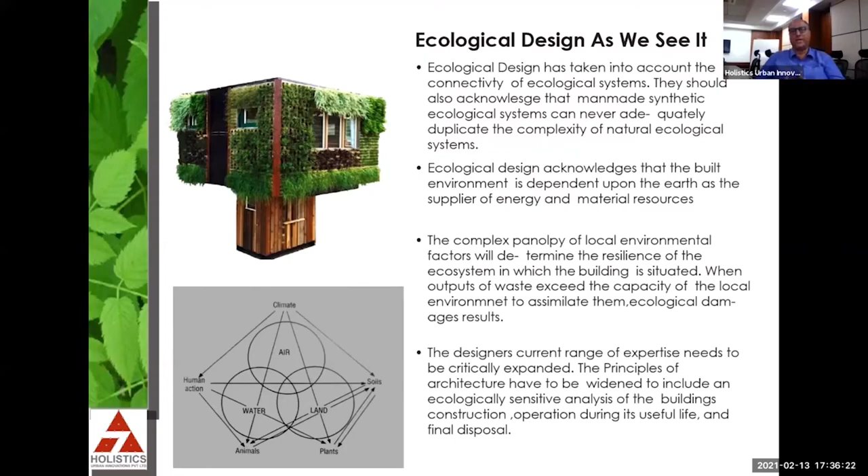The ecology design should take into account all these systems and adequately duplicate the complexity of natural ecological systems. It should know Mother Earth as the supplier of energy and material resources. The whole system should know how to recycle, reuse, and revisit all the wastes that exceed the capacity of the environment in these days, especially plastic and electronic waste. The designers should have expertise to be critically expanded in terms of wisdom, to include sensitivity, economic analysis, operations during useful life, and life cycle costs.

The theoretical framework for ecology design is very simple. Every system - when you come to the presentation, you'll find out how HUIPL has designed building systems. Generally a system has output and input. There's a process in which there's a benefactor, a beneficiary, an obtruder, and an objective in the process.

With all these things, the econometrics of ecology, sustainability and design should give ecologically sustainable design, which is itself a sustainable concept. So you come from part to whole, or whole to part. It's better to come from whole to part in this case.

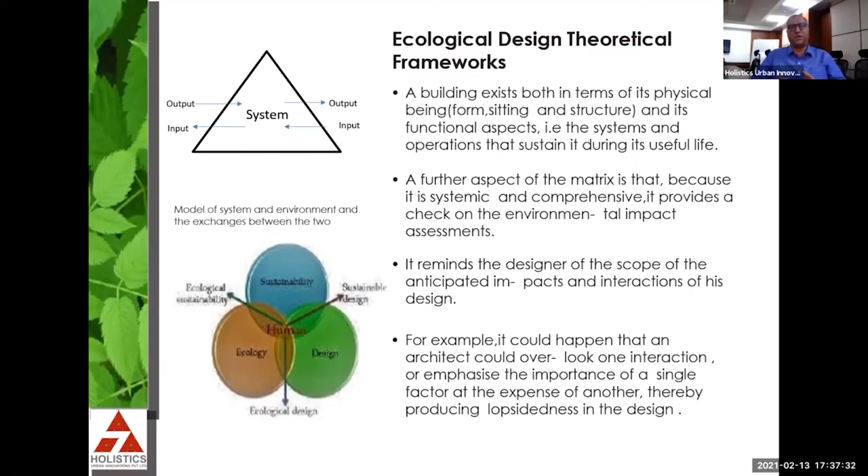I personally believe, with my 25, 30 years of experience in design, it's very simple - the design emanates from 5 elements of life only: earth, fluid, spirit, air, and fire. All architects know that whether it's biomass, built form, or ecology, these are somehow related in some alpha, beta, or gamma way with the whole process.

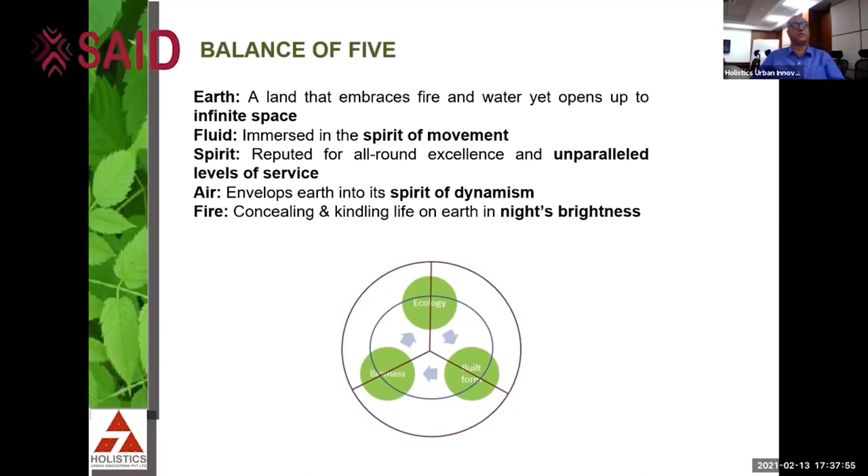Whenever we design buildings at HUI, we have these objectives - generally all architects have this - they want to create a state of art, futuristic buildings. They want to benchmark it with the best in India. They want to aim for LEED Platinum, passive solar techniques, rotation, green vertical walls.

This is where it starts - the green thinking starts. But this is where our design ends. How we have gone - basically every design process has an activity pattern and a circulation pattern. It has an activity concentration and a circulation concentration. How to delineate it properly is where the designer comes in, and how to make it interact with the environment.

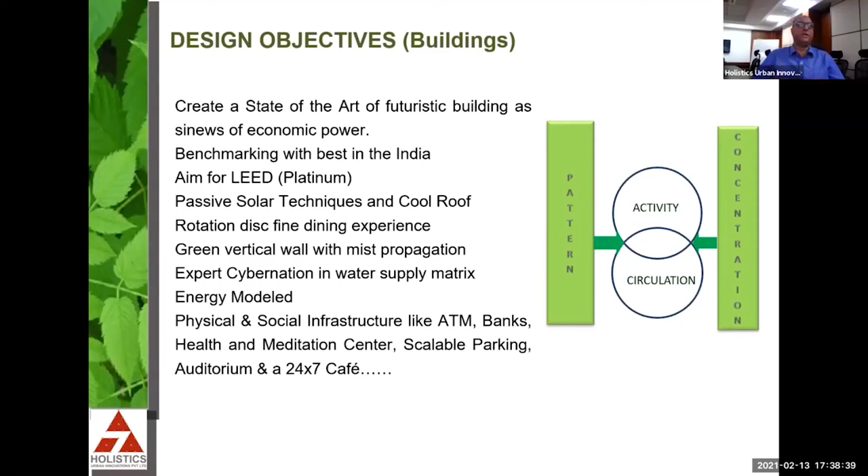This is what's most important for any eco-design building. See, the general building goals in India right now, everybody wants to have office complexes with USGBC, TERI GRIHA, and B. This is all component level, the building level.

But what impact it has on the biomass, the grey water system, the blue water systems, what is the effect on the total environment, and then as a component of the whole world, it needs to be seen by all architects before they design. I had been emphasizing in all the seminars that whenever we epitomize something as best modern architecture, it is not modern architecture.

We have modular grids, 8.5 for offices, 4.5 for residences. These all things are okay when it comes to the box thinking of form and function. If you actually want to see from biomimicry to bioclimatic architecture, you should see the building as part of a larger process of biomass, a larger process of blue systems, a larger process component of air, water, and even the temperatures regarding what we call mitigation of the heat island effect.

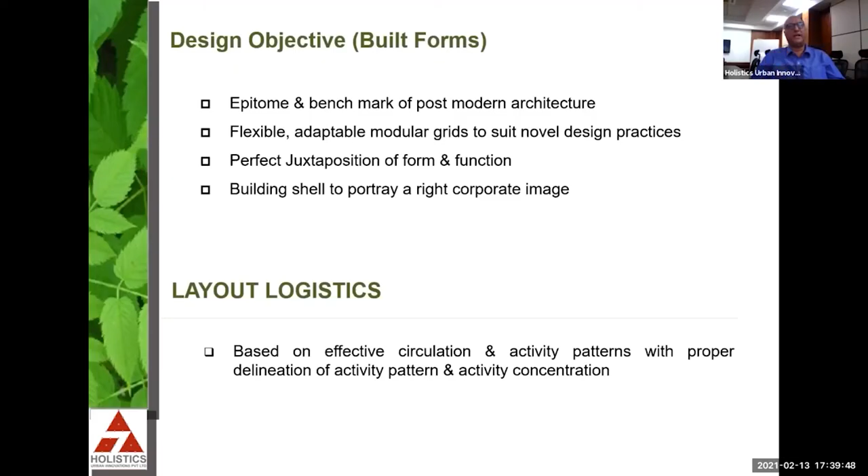There are two phases, the building design and the master planning part of it. So if you see the eco master planning process, it has simply 4 systems. The blue infrastructure, which contains water supply, water bodies, water life, aquatic life.

Then you have grey infrastructure, which is water, roads, sewer lines, water circulation, grey water, and this is how to do watershed management. Then you have red infrastructure, which is human body, human life, human population inside a building, their interaction with the environment.

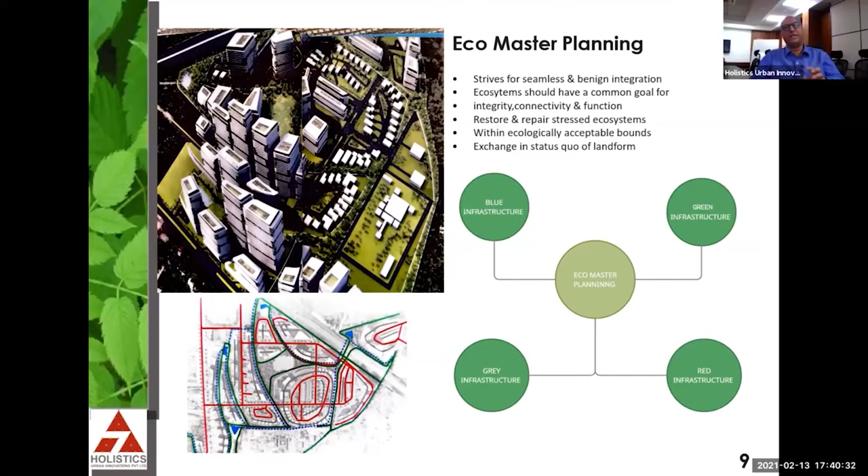How you have to make the walkways, their relation with built forms and the perception of the built forms. Then you have green infrastructure, which is generally landscape, green linkages, linky greens, and a lot of ecospace. In the eco infrastructure, we have listed certain factors which are the objectives of a design.

Whenever we do a green infrastructure planning, we should classically see and conserve natural features. Ecological connections to the whole process should be in terms of air, water, land. It should not be physical, it has to be conceptual also.

Then retention of biosphere - whatever component of biosphere is there with us in that small area we design, we contribute to that. Then prevention of air and water pollution at that component level only. And then microclimate control, which is very important in terms of mitigating the heat island effect.

Most of the projects we do are based on authority where water is to be carried from Ganges to Noida. So we should try to see how the whole process can be taken with less water usage, innovative water technologies, how we can put less stress on water, especially at the city level and at the national level.

Then grey infrastructure, large engineering systems such as roads, sewers, drains, eco-engineering, efficient transportation systems, battery-based, then energy utilization for this transport, how to reach the site. Most people generally say we can use bicycles, but that's not possible. So you have to have eco-gadgetry hardware and efficient transport systems.

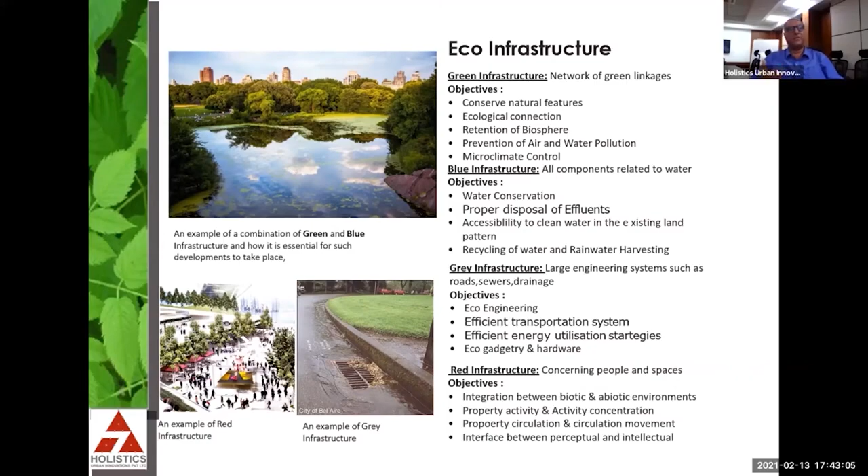See, the design objectives of planning - what we basically need is, from the economics, you have a social grid, you have to have an energy efficient grid, a waste recycle grid, and this should give rise to one synergistic whole.

See, generally people say ecology is a part of environment. We say it is not. Environment is based on other factors, it's based on land, water. Ecology is larger - it's on biomass, aquatic life, the natural runoffs. So we have to integrate both of them.

Then you should have landscape which can include major theme parks and sport complexes together. Then it should be equipped with state of the art physical, socio-economic infrastructure, like net infrastructure, net connectivity, charging points, battery charging points. This is a part of the planning process now.

Like 10 to 15 years back or two decades back, we used to see glass as a medium of showing sinews of economic power. Now these things are sinews of economic power. And people started talking about watt per square feet in office spaces, generic power, and wastage of power, light watts. This was not initially there.

People started coming to talk about fossil fuel level power also, cost per square feet of fossil fuels to run a complex. And then fifth generation intelligent regions we should have with full use of information communication technology.

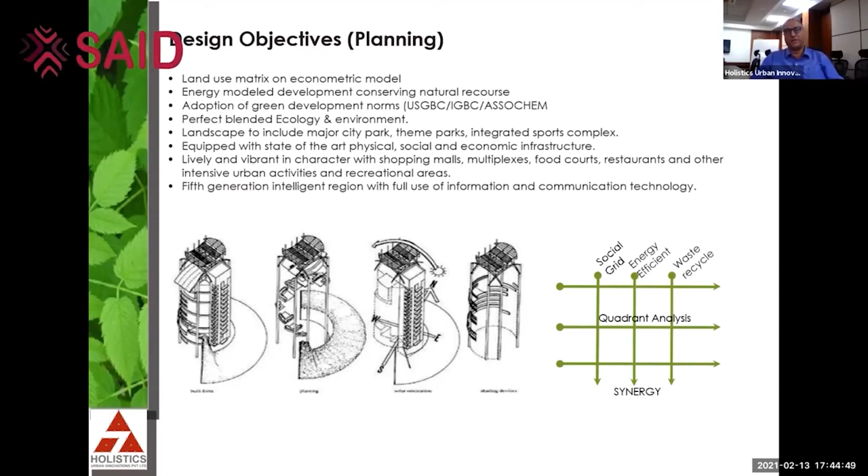We should use technology to enhance the green mass, enhance the ecological parameters, and enhance the green parameters of development. This is the methodology we use generally in planning at our office at HUIPL, which we have designed over time because of our experiences.

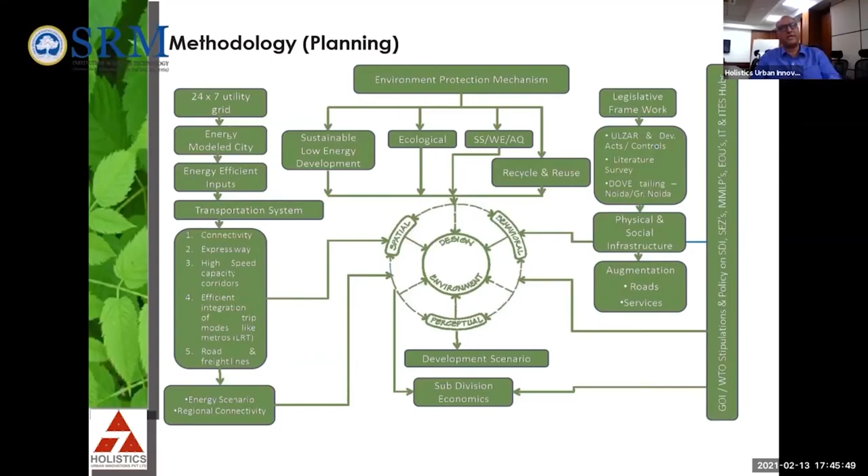And then we come to sub-division economics. What was the plot size? We did a township in Dehradun 10 years back, which was zero discharge at that time. Though it was on the bank of a river, we didn't draw water from the river. We had municipal supply and our own augmentation systems. We were first to use watershed management, rainwater harvesting tanks there, which was distributed again by gravity to the people.

Now, what in India we miss mostly in our country is that we don't have an evaluation or review of our built-up programs - that whenever we make something, we never have a survey of whether a city had biomass of more than 20 acres, or what other requirements of greenery are already present, and how to save the ecological footprint. So that is where the whole thing comes.

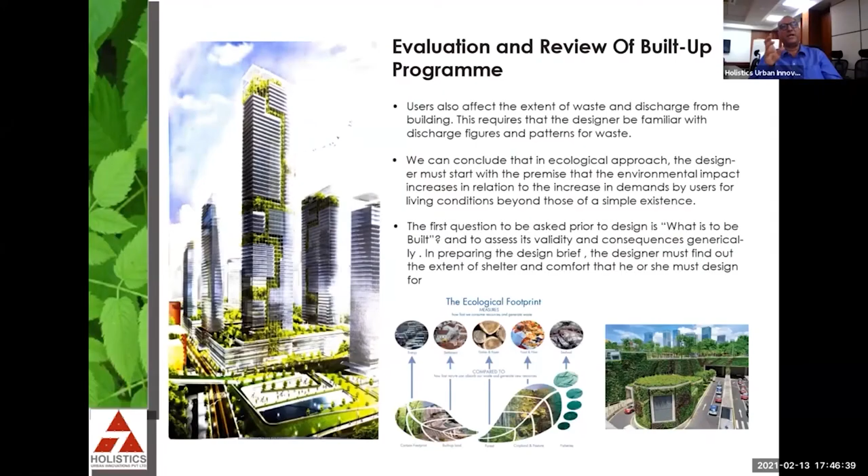What we try, our modest effort is to save this ecological footprint and have least environmental impact on living conditions. Then in preparing the design brief, the designer has to find out basically shelter and comfort at what energy cost it is there. Now, coming to the component level building design.

If you see contemporary architecture, after we do the planning part of it, we have green architecture also in place. We have high-tech architecture also in place. We have creative architecture. We have parts of Bionic architecture in place.

Now, Bionic is one thing we are now going into, because all these natural shapes which are coming all over the world are based on the thought that some of our biology and plant structure is structurally safe. It is environmentally friendly. It has all the process of carbon cycles, carbon rating points, and oxygen production systems. So that forms the basis of fractal geometry.

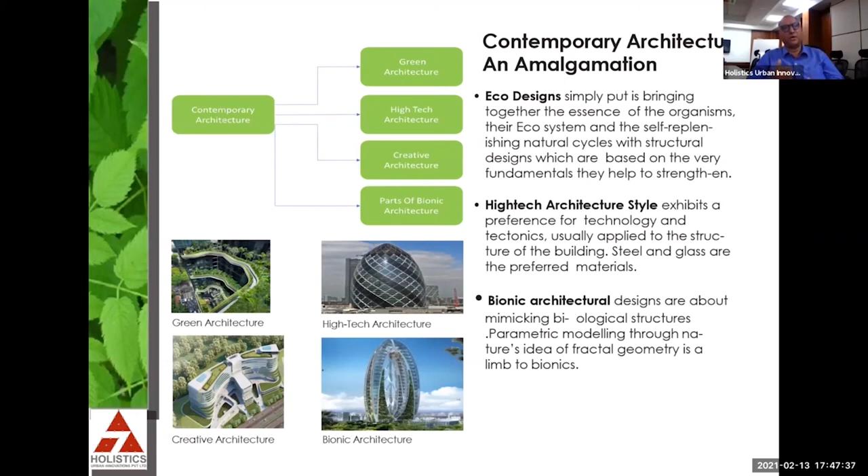It has to be used from top to bottom in building design for structural efficiency, for water use, for how to take things from the atmosphere and give back into the atmosphere in terms of water, how to make green covers and increase the green life, green cover for the whole concept.

Now, the hierarchy of ecosystems - we have mature, immature, implified ecosystems. When we see that 75% of the world's energy resources, vast pollution and climate changing gases are due to buildings, activities and services and transportation, we should know the role we play.

What is the total quantum of pollution we create by doing these buildings? And skyscrapers have never been environmentally friendly. It's a misnomer in people. They are electric guzzlers.

They are a strain on infrastructure, a strain on power. If you design it properly, it's a vertical steel structure, what Frank Lloyd Wright called a mile-high steel. It's a vertical steel which can develop the same parameters as normal horizontal development, and better, in terms of green cover, oxygen production back to the environment, and waste usage. You have more collector basin per square foot, 1,000 times more than a normal landform of 5 acres.

If you take the FAR of 3 and 5 acres, for natural mature systems we have to think clearly that we have to allow them to grow and regenerate. For implified ecosystems, we have to see what controlled burning is, why we mow or selectively log areas by biotic components. We have to be very sensitive to site-level biotics.

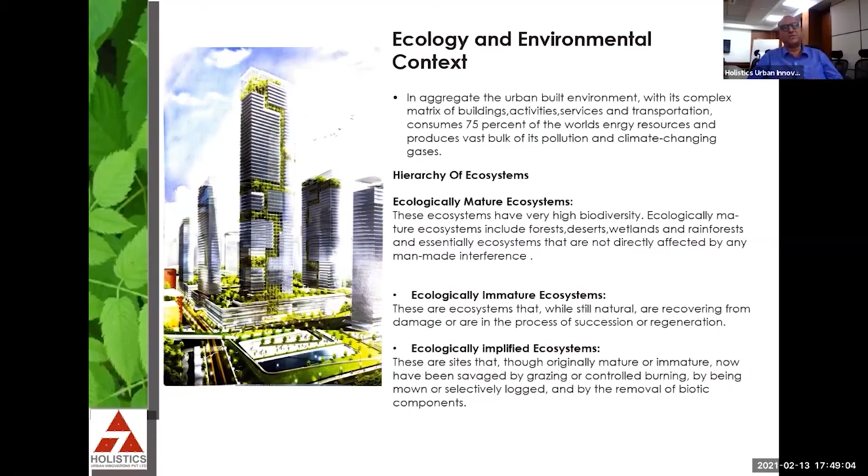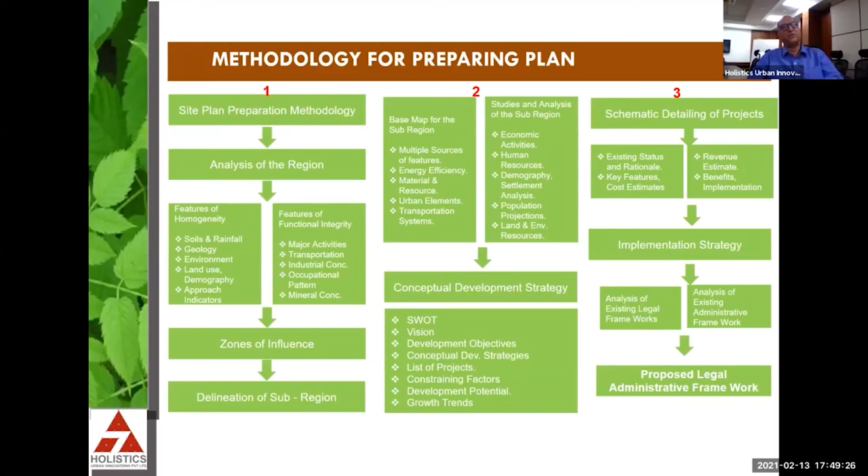Now, methodology for preparation of a plan. Basically this is a presentation, and I'll go fast because most of the zones of influence and sub-regions are like master plan level content, what should be the SWOT, what materials are to be used. I'm going fast on this because it's basically additional guidance on how to proceed, especially for planners who are responsible for large-scale ecological decisions.

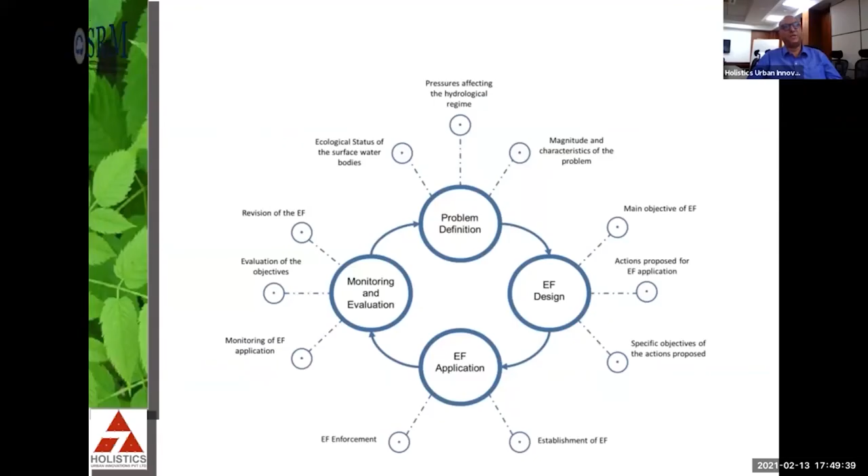There's another problem: how we define the monitoring, evaluation, and EF application design, that is the hydrological regime, main objectives, how we enforce it. This is the jargon - whatever goes into environmental investment: water pollution, land pollution, air pollution - all these connections have to be made by the designer before he designs a building of scale more than 2 acres, with a FAR of 2.5, because then he is contributing to everything.

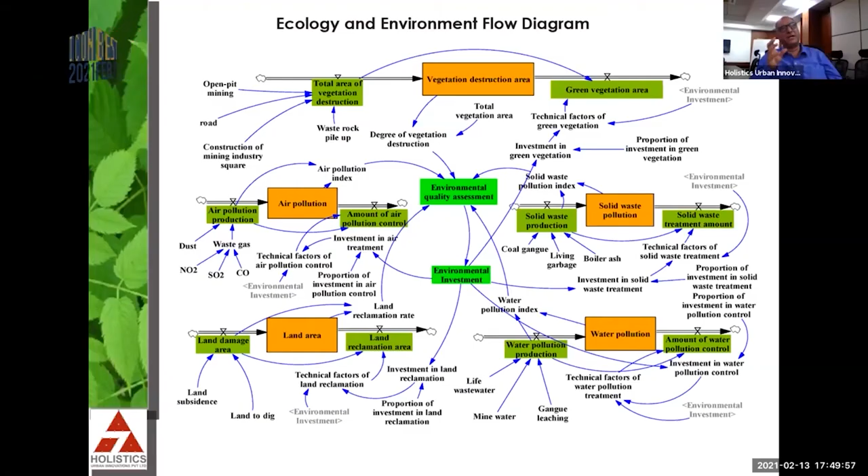Now the second important part is management of energy and materials. Everybody says we have to be water positive, air positive, recycle positive - all these positives are stated. But when you actually come to building design, the issue starts. If you have augmented power of 5 generators, it takes all the carbon credits off from your design. That is why the challenge for designers comes in.

Waste and recycling of waste is the most important thing people should consider in embodied energies - that is biomass - how to retain energy from these parameters and sectors and put it back after channelizing it properly into the building. Then material selection has to be as per UL listed, NFPA guidelines, and that's part of design.

But like reinforced concrete - it is said to be recycled, but it's never truly recycled. You never get steel back in the same form. There's a lot of carbonation that takes place, a lot of acid action, a lot of things that happen to carbon steel once it's cast. So these things are all theoretically done, but they don't actually give any real result.

So while designing a concrete frame structure, you should consider the embodied energy - whatever energy has gone into the steel for making it, and whether the recycled content and cladding that goes into it will give you the same amount of reuse, at least 50% of what you're putting in.

And now, regarding fossil fuels, in the next 50 years we know how the world is going to behave. It has to be power based on green fuels, solar, bioclimatic, biogases. So this is the thinking - and wind, which I think will be the major source in the future because solar has issues.

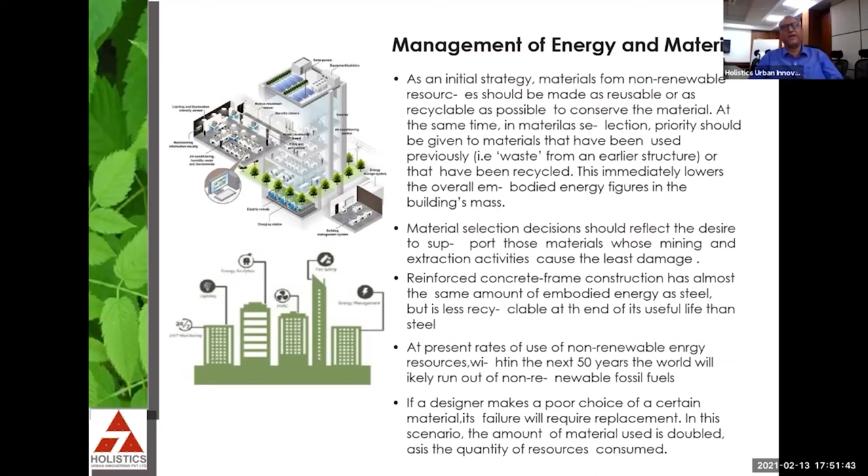Now what we want to highlight is how we have designed the building into subsystems. We have a building structure system, which has a direct impact on eco-engineering and infrastructure, and it can control pollution activity during construction.

Then the building transport system - that is lifts, escalators, parking, travelators, corridor concept. Here you have to optimize energy performance through fundamental commissioning and verification. So you should know, while selecting lift systems and travelators, how much energy is going to be used per power per cycle. Everything has to be quantified per cycle, per square foot, power consumption into parameters.

Then you have building power and lighting systems. Lighting is a very important factor - if you have proper daylight in the building, daylight design, this system can be taken care of.

Then you have the building air quality system, where you basically have to see how much you can trade off, cooling areas by convection rather than by HVAC systems. So the design of the air conditioning system has to be environment friendly. It has to be as per the Montreal Protocol, and it has to have carbon sinks in consideration - it should be designed that way.

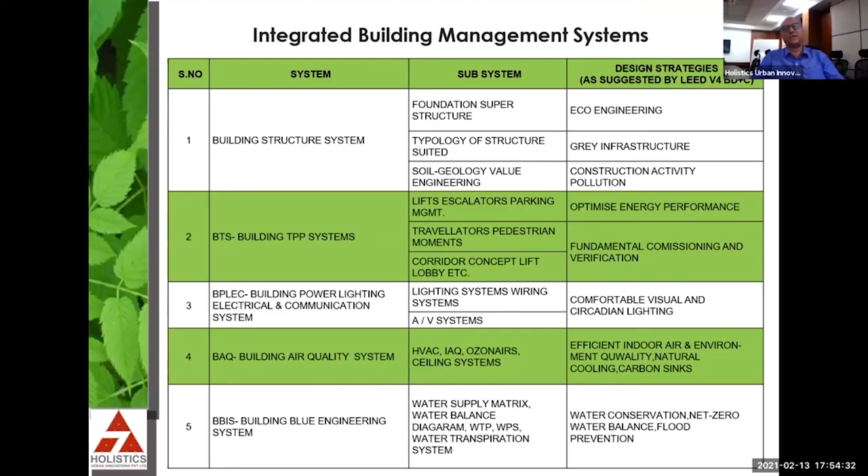It's not only water balance, it should be net zero, but it should be positive than net zero. In northern India, in the Indo-Gangetic plains where we have plenty of rainfall, the water per square foot of harvesting area into this K factor—it's called the KI formula—you'll see we can store water in a building for at least six months' use in a multi-story building, if it is properly designed with water tanks and purification process inside the building. So multi-stories are the best option for it, and skyscrapers are the best option for it, because you get a lot of surface flows to do this type of work.

Now there's building red infrastructure—that's the pump house, visitors, facility maintenance. It is again taken care of at the enhanced commissioning stage also.

Then you have building envelope system, that is fenestration, curtain walls, facades, skylights. This has to be done to mitigate the heat island effect. Then you have to understand UV—I've not gone deep into technicalities here—the UV and IR effect, how to select glass. Glass should be only on the northern side. Most architects do this, so we've not gone into those things.

Then building environment management systems—there's the hardscape greenscape which has to be brought in now. You have to see habitat connectivity, you have to see your project component as part of a larger project. If you have bigger land available for a park, make it such that it can be used by the neighborhood also. Then building disaster management system, that is fire, terrestrial security, earthquakes, which has to be designed for.

Now ecology comes in also. If you are building in wetlands, you are doomed in earthquakes. So there has to be a zoning plan also—which places are ecologically fit for building, which are not fit, and which are adequately fit where some kind of modification can be done.

Then you have building waste management system, which we always take—that is solid waste, organic, inorganic, recyclables. This is the future of the world. Every building generates so much recyclable waste in a development of more than 10 lakh square feet. So that is one area where the designer should think now, how these recyclables can be channelized into generation of energy.

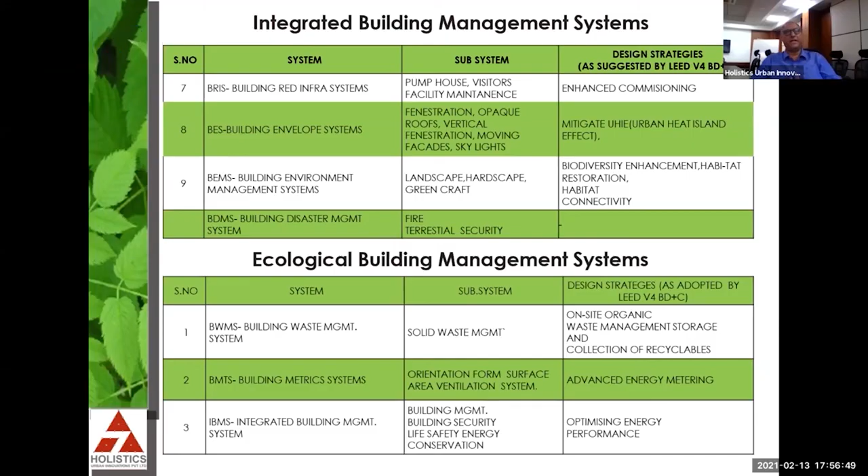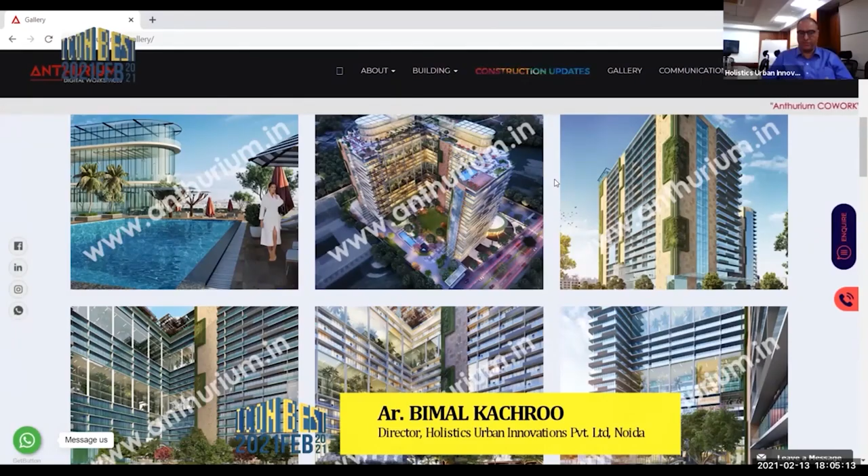Then BMS, building management systems—you have life safety conservation. Again, optimizing energy performance is the main design objective. So this is the general presentation. Now I will be talking to you about the projects which we have done. In total, I'd like to say that buildings, whether at master plan level, component level, or site level, the design has to be water positive, air positive, energy positive, and recycle positive. Thanks for this opportunity.